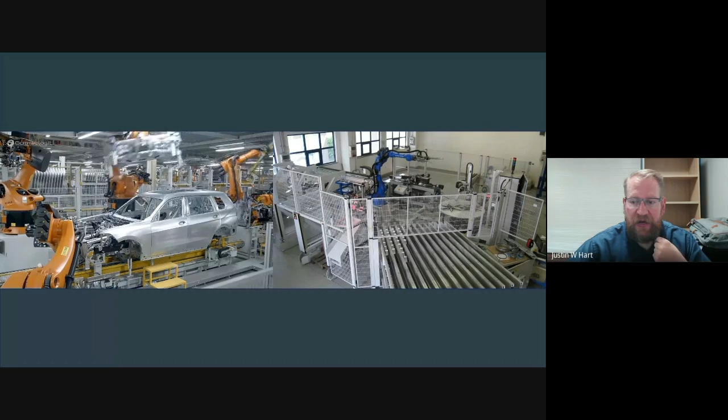I'm going to start by telling you a familiar story in the field, which is that in the 1970s, robotics really had its first industrial victory. That was when companies like KUKA started manufacturing robot arms for use in factories. The reason this was so successful back then is partly because the sensing and artificial intelligence requirements were basically non-existent. These robots work because parts are fixtured.

That is to say that they are mounted rigidly in place at sub-millimeter precision. So if you always make the same motion over the top of it, it'll always do the same thing with the tooltip on the arm. So if you're doing welding or painting or something like that, the robot's going to succeed at that. These robots nowadays run G code or languages very similar to G code, like what would run your 3D printer.

They work in part because they work in these cages. So if you look on the right, there's a robot arm. It's in what's called a work cell. A work cell is an area that separates the robots from the people in a factory or other operation.

The work cell gives you two advantages. One is that it keeps people away from the robots for the safety of the people, because the robot has no meaningful way to interact with the people. It can't detect them, it can't do anything special. So if a person moves into the robot's tool path, then that person is likely to be injured or killed, right? So you don't want that.

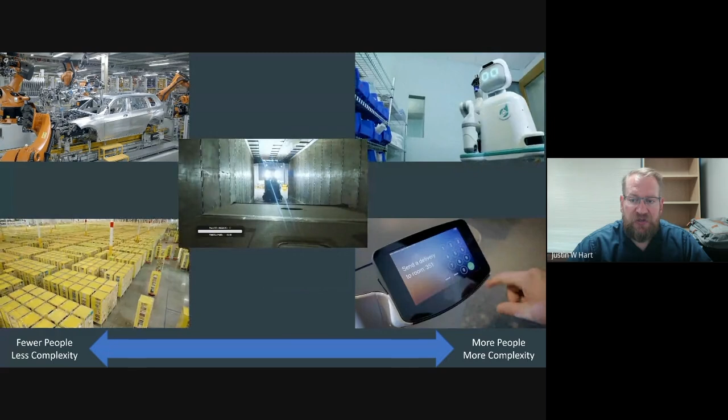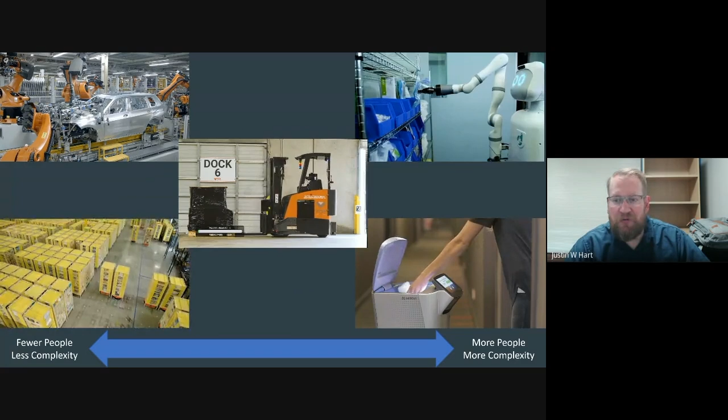But if you look at the emerging frontiers in robots, the places we're starting to see them, probably the first one that really looks modern is Amazon fulfillment centers. Modern in that this happened 20 years ago. There was a group called Kiva Systems.

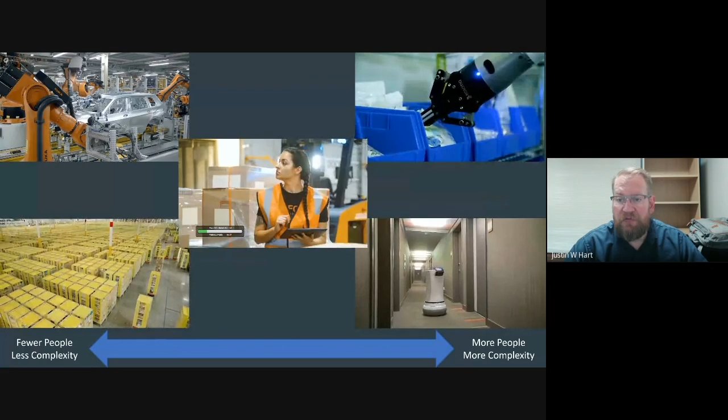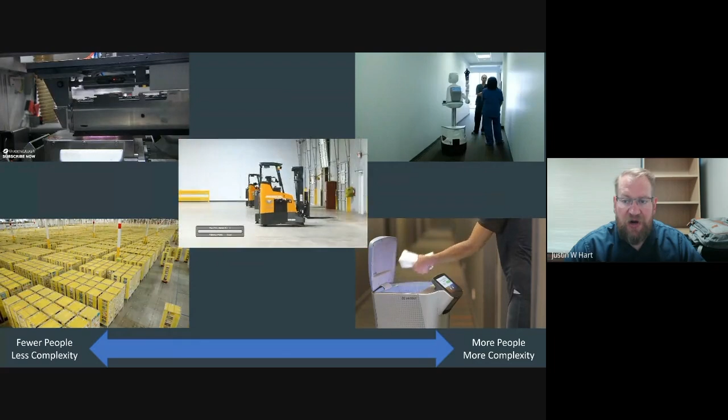People had been working on fulfillment center automation, and what they wanted to do is replace the role of a person called the picker. The picker in a warehouse drives around a thing that looks like a big shopping cart. They go up to the shelves of the warehouse, they pick items off the warehouse, and then bring it to a person called the packer who boxes the things, and then they're shipped.

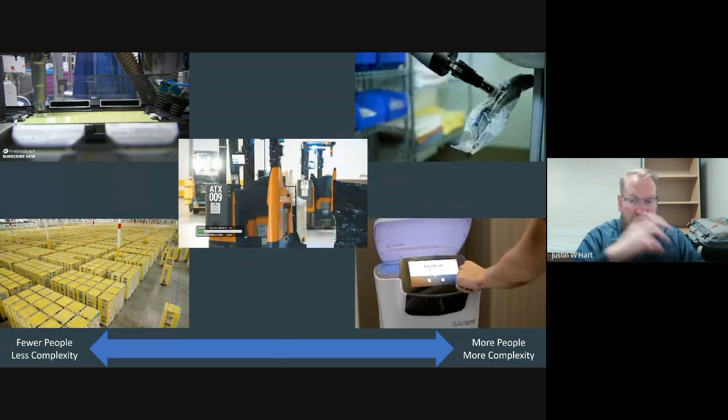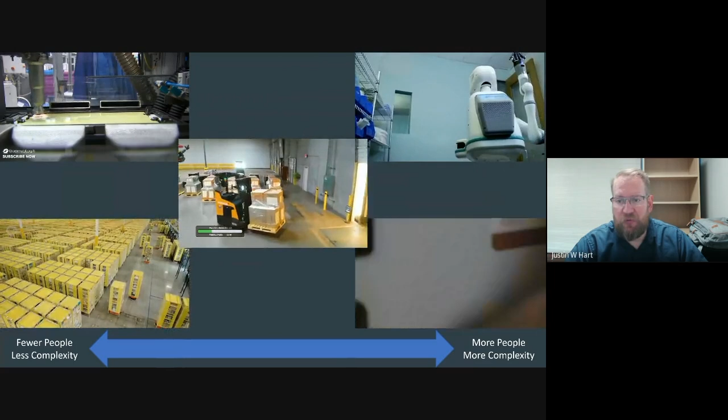What Kiva said is, well, we'll build this very sturdy robot base that drives under a shelf. It'll pick up the shelf and drive it up to the packer. And then I'll use projection mapping with a laser to indicate which item they should pull out of the shelf, put into the box, and that'll be how packing happens. That's part of how a modern Amazon fulfillment center works. Other fulfillment centers are pursuing other solutions because Kiva has patented most of these things.

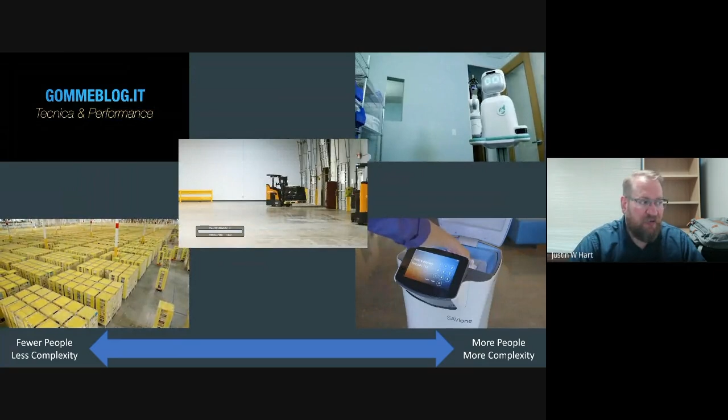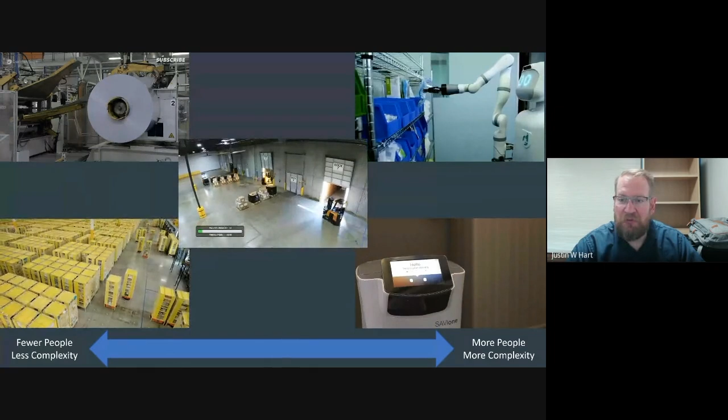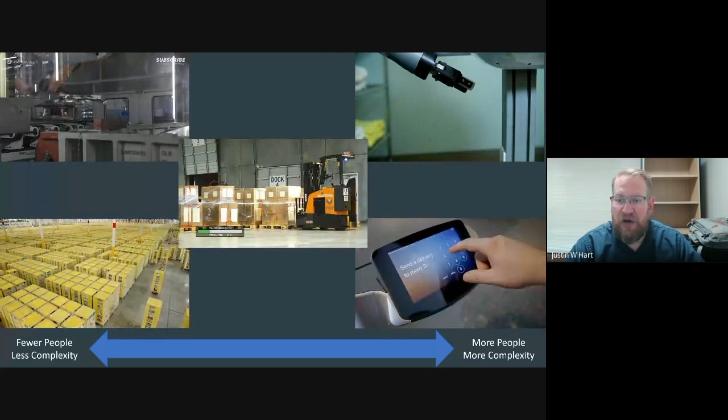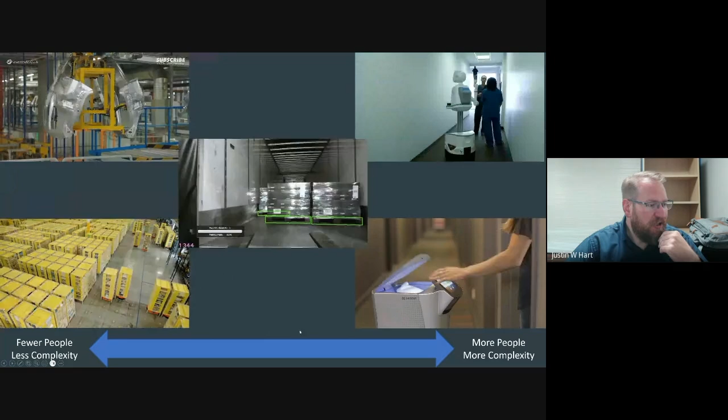If you look at the emerging domains, in Austin we have Fox Robotics, which will take palletized cargo out of semi-trucks and put them into the floors of warehouses. Diligent Robotics, which is UT Austin's spinoff, or maybe concurrent with her job at UT Austin, Andrea Thomaz's company, which has robots doing delivery tasks in hospitals. And then Savioke, which is a spinoff of an older company called Willow Garage, which does deliveries in hotels, room service. I've kind of aligned them on this chart. Granted, the axis is a little arbitrary, but as you go to the left, you look at the older applications, the things that have fewer people and less complexity.

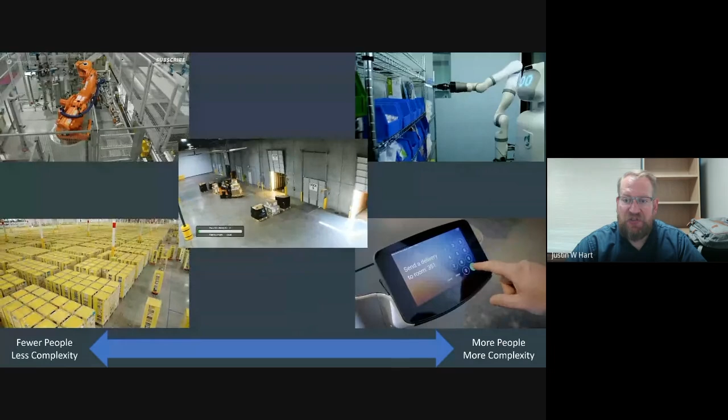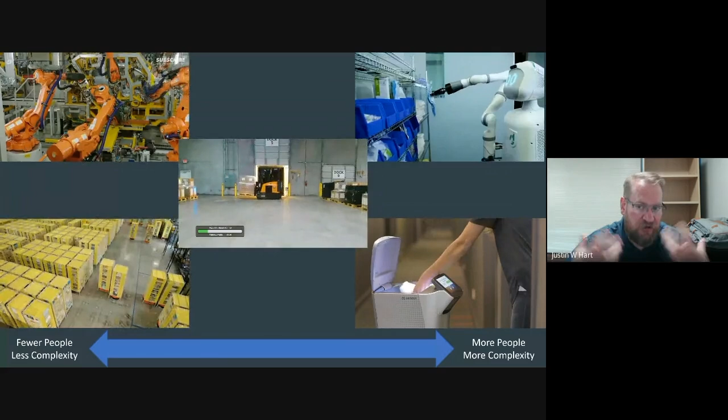People make the job harder because you have to interact with people and deal with the complexity of an environment that's designed for people who are intelligent, right? So it's not structured around the ability of the robot to service the task. And on the right, you end up with more people and more complexity.

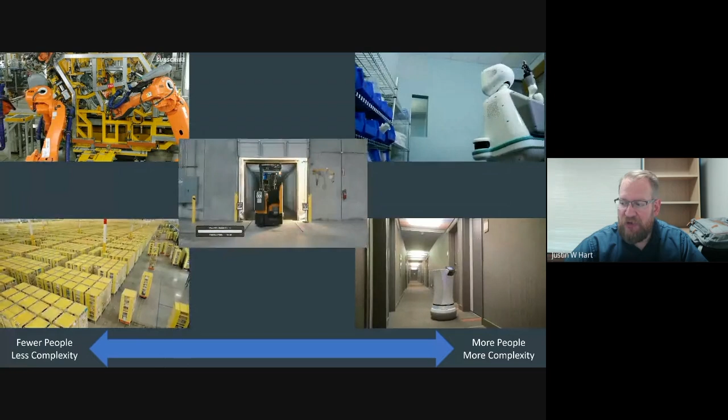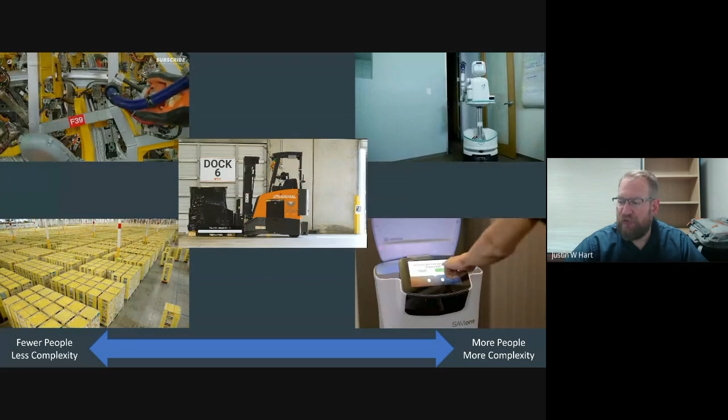Robots that are really designed for places that accommodate people. I kind of put Fox in the middle, even though they're an emerging company, because you can still coerce this task into something that is structured for the robot. So in my laboratory, the Living with Robots lab, we build robots that understand and interact well with people, and robots that operate in places designed for people.

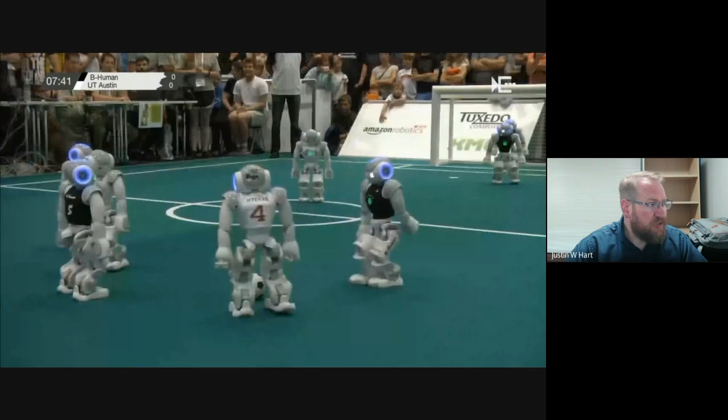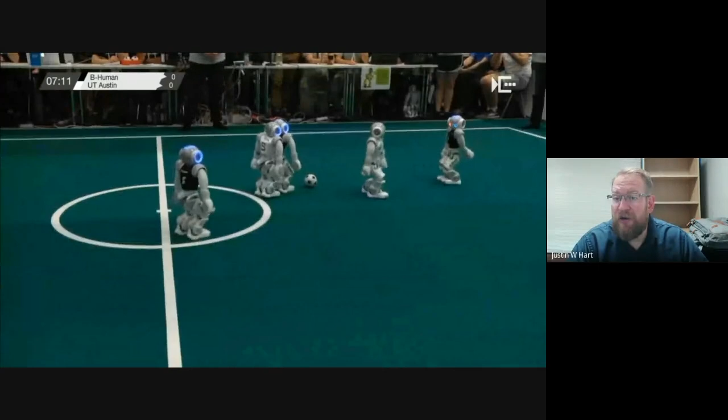This is the RoboCup Standard Platform League Soccer. SPL Soccer is played with the SoftBank Nao robot, which is a small humanoid robot. The use of standard platforms, where everyone's using the same robot, means we can reduce this to a software challenge rather than a hardware challenge. The perception being that, yes, you want to make advances in hardware, but maybe a team could afford to purchase a very expensive humanoid, and then do better by the nature of the hardware being much better, even if the software was on par.

There's also an adult and teen size humanoid league where you're allowed to bring your own platform. I participate in a different competition that's on site, called RoboCup at Home. I'm on the executive committee of RoboCup at Home, which means I help to plan this competition, help to run this competition, and design the scientific roadmap for it.

RoboCup at Home looks very different. It's competed in what's sort of a mock domestic space, built out of cubicle or stall furniture like you might see at a convention. But we populate it with things like tables, beds, chairs, a dishwasher—things where the robot can go through tasks that very closely mimic domestic chores.

If you look at the competition, it's divided up into two stages: stage 1 and stage 2. All the teams that qualify get to do stage 1. Half of them will be eliminated by stage 2. And the tasks are stated in this very general way.

There's 'help me carry,' where a person points at a bag and the robot picks it up, then follows them through a crowd of people and drops it off at a designated location. There's the general purpose service robot, which involves interacting with the robot verbally, asking it to do chores. There's also receptionist, and storing groceries, which is mostly a manipulation challenge.

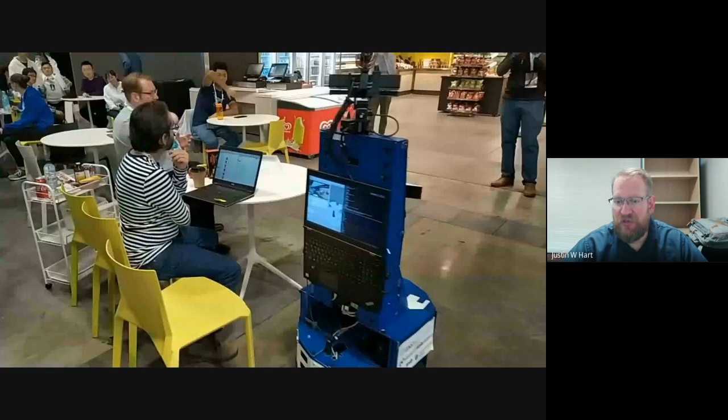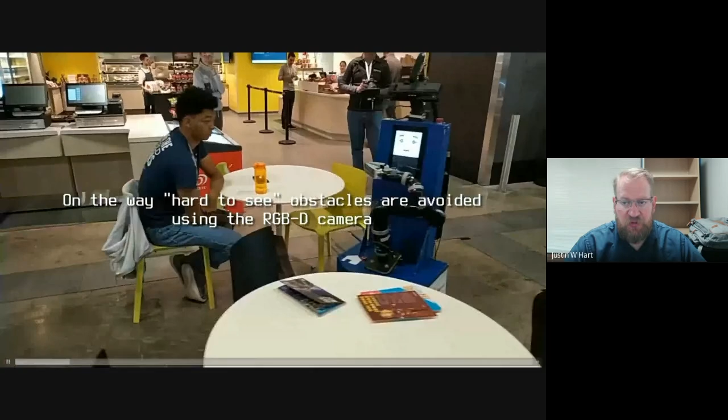This is the restaurant task, the most impressive task in RoboCup at Home. I have the audio turned off, so I'll just explain what happens. What makes restaurant so exciting to the league is that for most of the tasks, teams are given 2 setup days prior to the competition in order to map the arena and to retrain any machine learning.

It's actually very important because they do things like mark landmarks in the arena where the robot might pick up an object or interact with a person. In restaurant, they're not allowed to map in advance, so they have to use different techniques.

This is Gilbert Martinez. He's one of my former students, a PhD student at CU Boulder now. He was an undergraduate with me, and he's acting as a judge in this context.

What he did is he waved to the robot when it was at the front of the restaurant. The robot looked for the waving person, went up to him, and he dictated an order to the robot of food items that are at the restaurant.

The robot goes up to an area called the bar. There is a bartender at the bar who then assembles the items and puts them onto a tray for the robot, or hands them one by one to the robot, which then brings it back to the person who ordered those items and drops them off.

So points are awarded at each step of this, with the most points being awarded if you've completely satisfied the criteria of bringing the robot, the item over to the person.

And there are some things that are very good about this task. Being able to work in an unstructured environment, the mapping and identifying the person are challenging things.

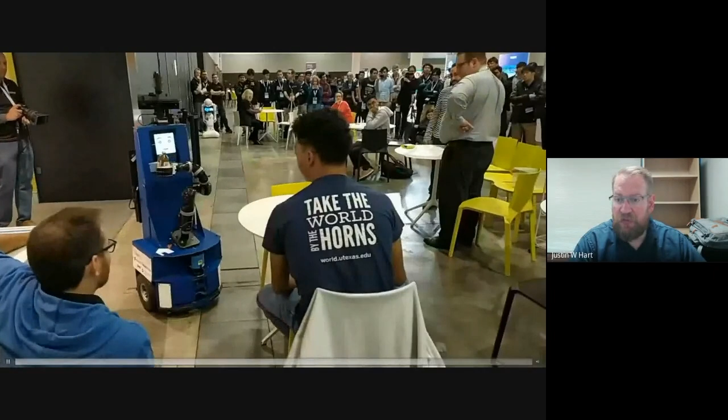On the other hand, there's a lot of stuff that could be improved. For instance, the robot will do this very awkward handover where it's just going to hold this glass bottle out, and Gilbert's going to grab the bottle from the robot, and the robot's going to say, I'm going to give this to you in 3, 2, 1, and open its gripper. This is not how people hand objects to each other.

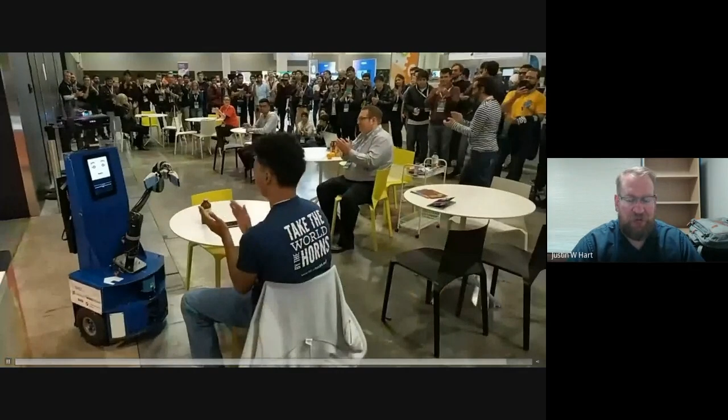You can also see that every time the robot manipulates something, people are very carefully watching it to make sure it doesn't drop it. So we want that to be better, right?

But let's talk about how we take this and turn this into science. In my laboratory, we work with robots that understand and interact well with people, and robots that operate in places designed for people.

If you look at how RoboCup at Home is structured, for most of the rounds, the teams are given 2 setup days to go and map the arena and to do what I call SLAM plus semantic markup. SLAM is simultaneous localization and mapping.

It's the standard technology for mapping in robotics. Most of the autonomous vehicles that you see on the road are doing some kind of SLAM. The basic version of this is done with a 2D or a 3D LiDAR, a light radar.

Any surfaces are marked up because a lot of this stuff is pick and place style manipulation. So you want to know where the surfaces are that the robot can potentially put something down. And then all the object recognition systems are retrained.

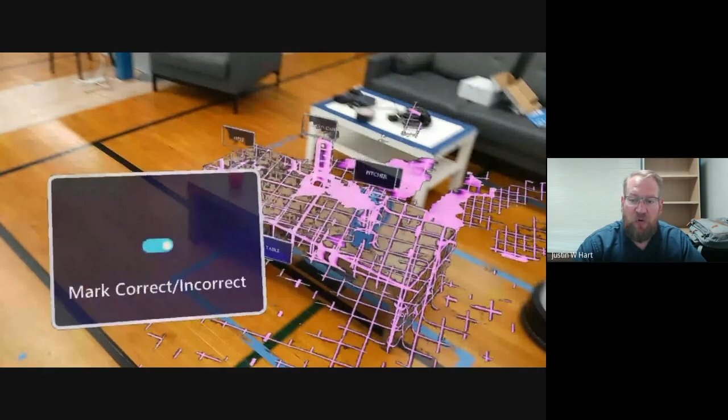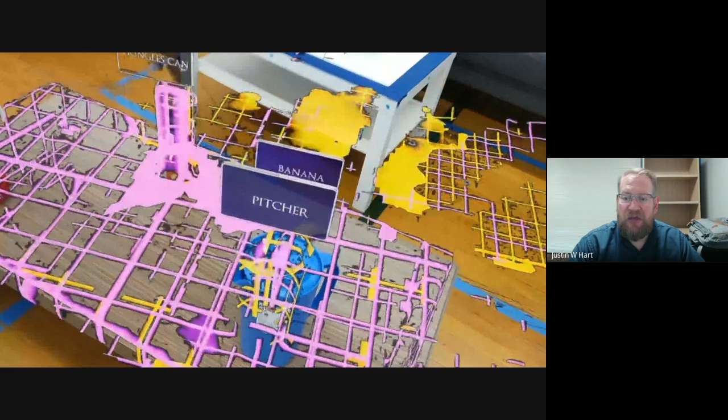But also, we can interact with them in augmented reality. This is important because if we want to deploy this at RoboCup at home and tune on site, we're often going to a foreign country. Our object recognition models work great in the United States on objects we've used for 11 months, but then in the two weeks we're in Brazil, everything is in Portuguese, the objects are slightly different, and the video doesn't look the same. So our object recognition models don't work as well.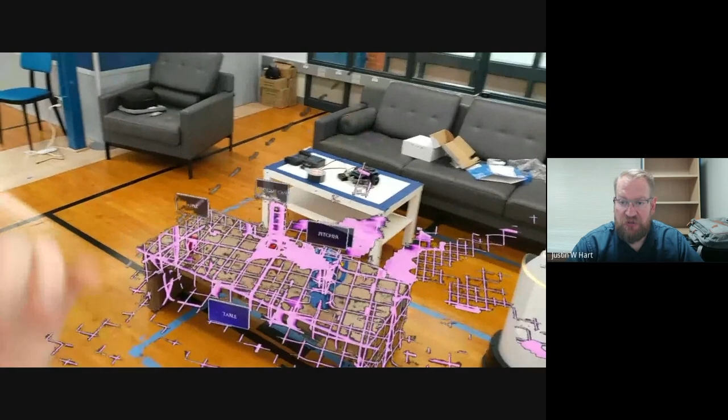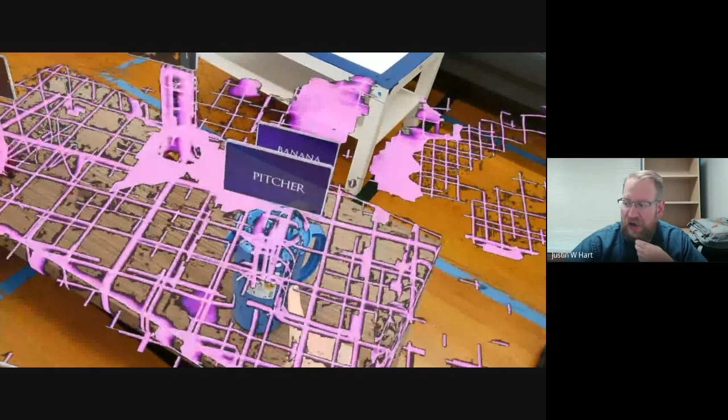With a Microsoft HoloLens, you can go up to an object, touch it, say this was mislabeled, tell it the correct label, and we have a convenient way to label our training data to send back to our servers at UT Austin, where we retrain our vision models. That's the pipeline we've developed for that usage. This isn't currently in use by the RoboCup at home team, it's still under development in my laboratory, done in conjunction with Cisco Research.

So I'm going to change gears a little bit, and I apologize for going fast. I have a lot of material I want to cover, and just long enough time to cover it all.

I'll talk a little bit about robots that understand and interact well with people. This is really my human-robot interaction research. When I work on human-robot interaction, I always say I want to model human behavior well enough that an AI system can interpret and project meaningful gaze and body language, and act in a natural human way, in this case on a robot.

The first thing necessary to this process is identifying communicative cues that people use. You want to know how people talk to each other, how they communicate. One hypothesis that's been around in the psychometry literature for a long time is that people look in the direction they're about to walk, to see if there are obstacles in their path or if they're about to trip. And other people look to where they're looking to see where they will walk. So there's predictive power in looking at other people's gaze, and this is part of what is called joint attention.

So that's a hypothesis - if you read it in the psychometry literature, it sort of says this is the thing. But if we want to do this on a robot, we have to be pretty precise in how we define this and what we mean. So we actually ran a human study.

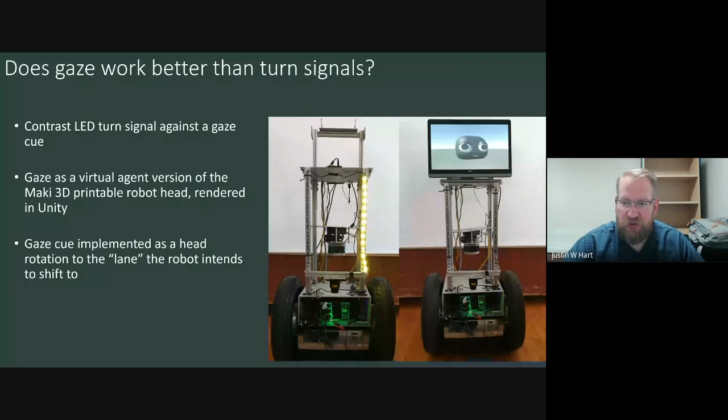We gave no other help. The robot is not trying to get out of the person's way, and it always goes into what would be the left traffic lane, since that's not the natural thing to do in North America. It's also not slowing down or ceding progress to the person.

However, what we would like to do is build robots that can also tune in on that gaze cue. That gaze cue happens earlier than when you move lanes, and we have some evidence of that.

A traditional way to do that study would be to use a Vicon motion capture system, which we do have on site. We could get two Tobii eyeglasses, though we only have one pair. Then you can get attachments that make the Tobii work with your Vicon, go through a calibration process, and develop software to determine where the person is looking. Then we could do the study like that.

But what we did instead is purchase HTC Vive Pro Eyes, which have an embedded Tobii tracker. What's cool about this is that it's already an integrated system. Knowing where the person's looking, where they're walking, and where all the tracking is comes together.

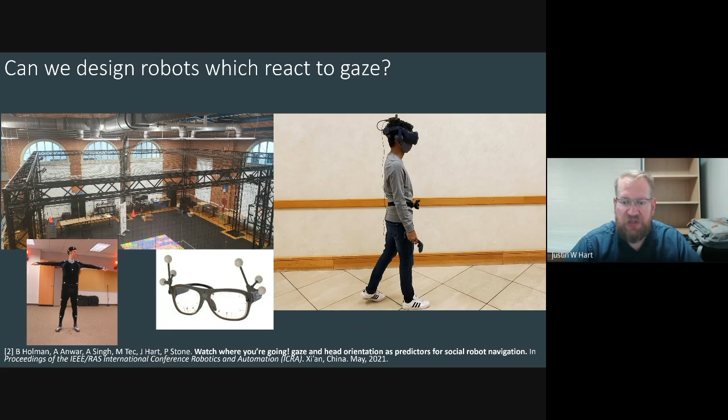We're looking at this over relatively short distances, a few meters. I don't remember the exact distance, it might have been 20 feet. But if you think about when you're passing someone in the hallway, knowing if they're going to go to your left or right within that kind of distance is actually super useful.

That's long enough to get the robot to sort of politely cede away from you, as opposed to feeling like it's going to run into you.

Even though this might feel like, why do we care so much about this? If you look at newspaper articles, people say delivery robots are banned in this city because they're causing problems, or they're not being used at malls and things like this. This social navigation stuff is the thing that's going to enable those applications.

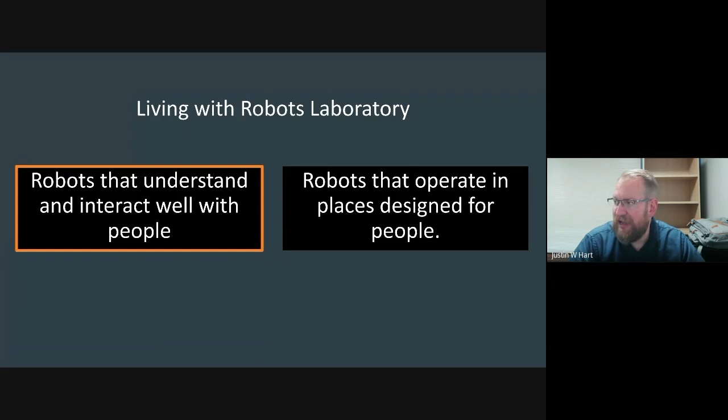Large language models are very popular at the moment. If you look at what's going on in LLMs, people want to field them in all sorts of applications. One thing that people wanted to do in robotics, and that we're starting to do, is get some practical knowledge about the real world out of a large language model.

If you look at traditional robot planning, usually we're doing that in a language called PDDL, Planning Domain Definition Language. PDDL requires us to exhaustively enumerate all the objects in the environment, all the actions that the robot can take, and then we run it through a PDDL planner, and it's great.

But what you can do with a large language model is say something like, 'Oops, I've made a spill. Tell me the steps that you would take to help me clean it up.' And then the robot can list those steps. What we can do is use embeddings and match them up to skills, the same way we would with a PDDL model, and have the robot execute the steps, like pick up sponge, wipe spill, drop off sponge.

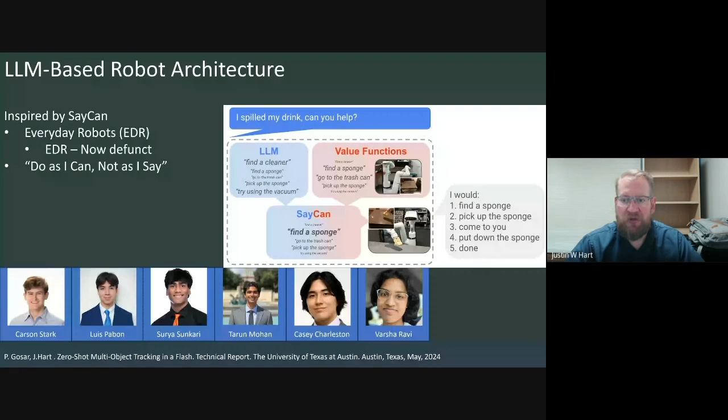So this is just a matter of how we prompt the model and how we get the robot to do this. We've fielded this robot quite a lot. It's a super popular robot. We use it to give tours of the Anna Hiss Gymnasium, and it is right now not the de facto tour guide, but the computer science department would like our robot to start being the thing that gives tours.

So what we're doing is fine-tuning that tour-giving capability so it has all the knowledge that a tour guide would have. It's tough to convince your research assistants to exhaustively annotate all the stuff about the building, because we want to give tours, especially when you're putting them under a lot of pressure to publish papers.

We want to then take that and test modes of human-robot interaction live and deployed on this tour guide. So we have a little bit of IRB type stuff that we're going to work out so we can test stuff live with real study participants, real people who are really getting a tour, so we can test human-robot interaction in situ.

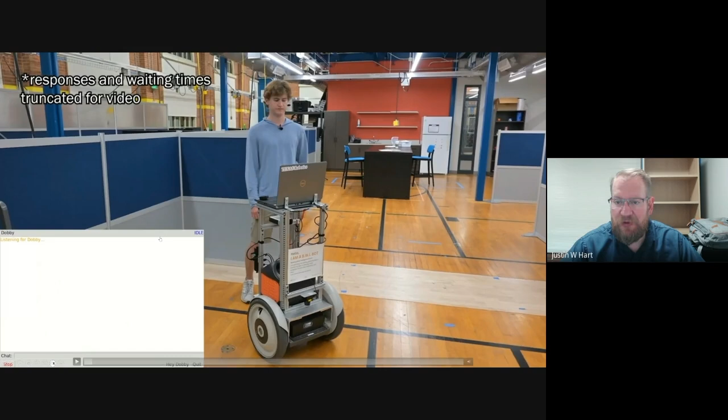So here's a video. This is the companion to our RO-MAN paper this year. RO-MAN is one of the premier human-robot interaction venues. This is a demo of the tour guide giving capability.

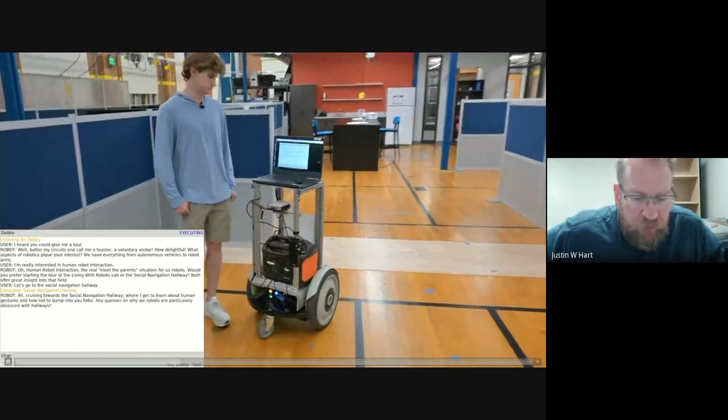Oops, that was my bad. I accidentally, sorry guys. Is this supposed to have audio? Oh, do you not hear the audio? No, no. Oh no. Yeah, okay. Well, let me explain what's transpiring rather than fixing the audio problem.

So Carson, my student, is having a conversation with this robot, and the robot is using a large language model to do a handful of things. One is to generate dialogue to respond to questions, to say, this is the this and this is the this. It's not got a script of what's on the tour, but it has files which describe the environment and all the objects in it, and it carries out dialogue and uses the data provided to it to respond.

And that is basically just files downloaded to the robot, though we're working on adding RAG techniques, retrieval augmented generation, which is a large language model technique, to generate the facts that the robot discusses. It's also using the large language model to decide the behaviors and actions of the robot.

And there's quite a lot that the robot can do. One is that it'll drive from location to location. So it'll say, oh, the person's asking about the RoboCup at home area, let's drive to the RoboCup at home area and discuss this.

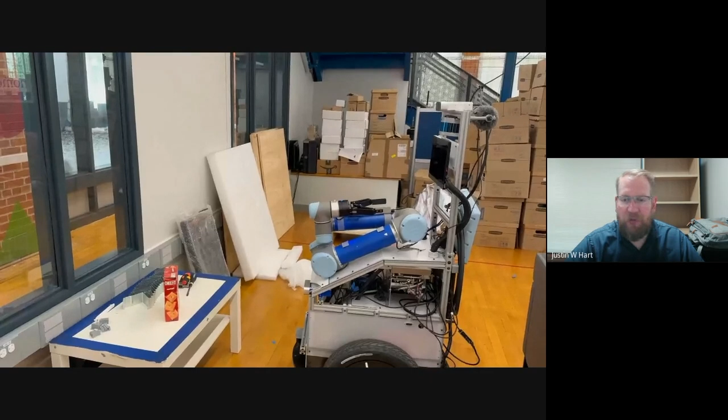So here's a quick demonstration of that. This is a robot, this is version 5 of our building-wide intelligence BWI bot. So this is a custom robot, custom mobile manipulator that we built here at UT Austin. It's like the other robot that we showed you, but it's got this UR5 arm on the front.

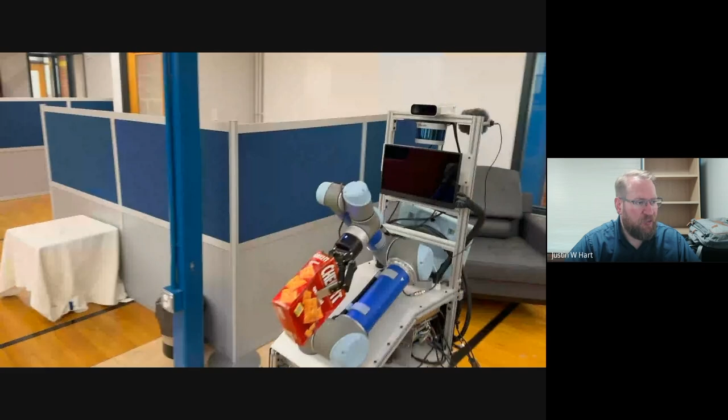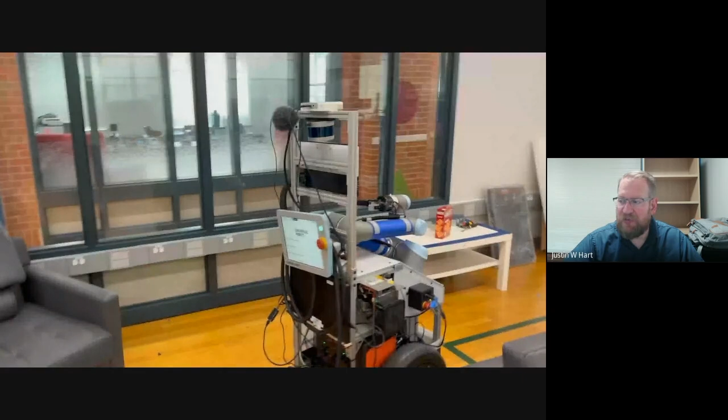And we just said, pick up the Cheez-Its from the one table and put them onto the other table, and the robot wrote code to perform that behavior. So that's pretty exciting. Right now what we're trying to do is make it generate more exciting behaviors, generate more exciting code. So the basic concept's been demonstrated, now we're trying to do more exciting things.

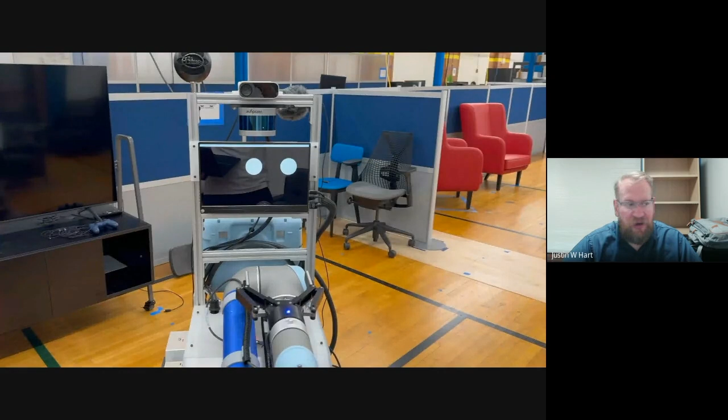Right now we have this material in our system for the purpose of code generation, and of course we're testing it and trying to make it better. But with that, I'm kind of done with what I had to say today, so I guess I'll stop talking and open up the floor to questions.

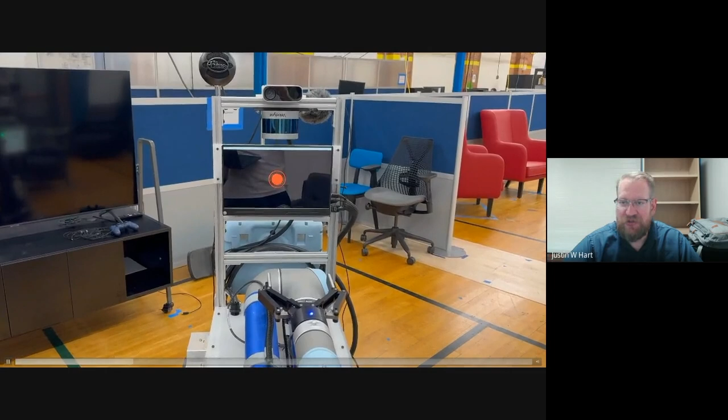Yeah, so I also have one question to break the ice. So I saw a lot of these robots, they're like moving around, but where's the code run? Like you mentioned LLMs or RAGs. Is this something that's running on some servers and then the commands are being sent to the robot, or are they run on the robot itself?

So we have different ways of doing this. Most of the controls for the robot are being run locally, because you don't want to be connected to the cloud and rely and have that latency. There have been major cloud robotics efforts, and some of them successful, but latency is the real killer in cloud robotics. So for control layers, people have done it. I don't know if it's the most practical thing to do, but if you have super high speed wireless, then sure.

In terms of our LLMs, this is ChatGPT, so we are using cloud services for that, but we do have versions that run local language models, distilled language models, because they're more responsive and faster. So it sort of depends on the context and what we care about.

It's actually kind of hard to convince students that they don't want to use ChatGPT, because it gives the best output. But on the other hand, in RoboCup at home, they're time trials. So if you're burning time making cloud requests, and there might be 4 or 5 of them because it's like: tell me the state of the problem. It's like, oh, you're introducing yourself to someone. Okay, say your name. Okay, they said their name's Bob. Now I know their name is Bob, I put that into my model. You have this back and forth thing. That's a big problem, so those students are easy to convince to use a local model, a distilled model, something that'll give them pop feedback.